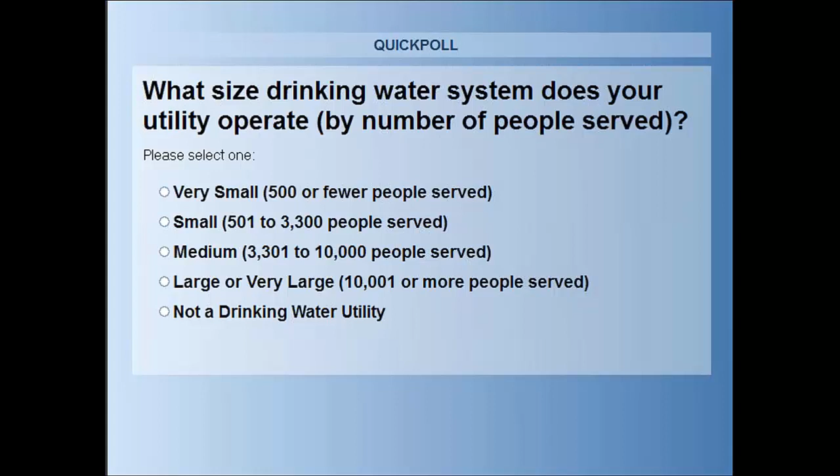I started out doing hydraulic models for master plans. And as I got into the extended period hydraulic modeling, I started seeing these interesting operational similarities and things like pumping in circles, not utilizing storage, peaking off sources. And I just thought, this can't be very efficient. And so I started getting into what I called system optimization studies.

And you can see my Venn diagram there, that I focus on saving energy and saving money, but at the same time we're looking at water quality and the level of service. We can't sacrifice water quality or the level of service or the hydraulic performance of our systems going too far into energy efficiency. So it's a balance between all those things. And in reality, most times when you fix inefficiencies, you actually improve system performance and improve water quality. So that's exciting.

So over the last couple of years, I started also getting into water and energy audits, and then started helping power companies with their efficiency programs. The last I counted, I've helped over 40 water systems directly, and then countless others through the UNC Environmental Finance Center, through rural water associations, through state divisions or departments of drinking water. It's getting very exciting, being able to help people find inefficiencies in the water system and at the same time save money, this untapped source of money.

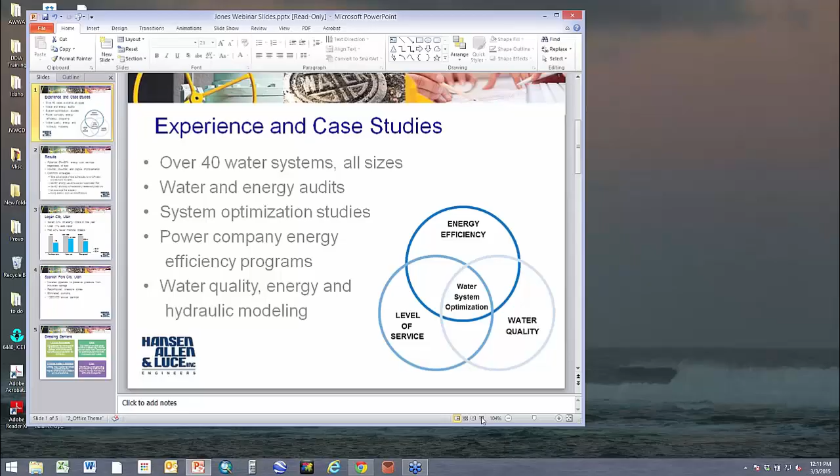And so going to my next slide, the results. For several years, I was just preaching this and doing the studies, but it's exciting now to have lots of results. Usually what I see in all systems that I look at is 5 to 50% in energy cost savings, and that's regardless of size, large or small. And EPA Region 9 just did a pilot study not too long ago where they showed an average of 17% energy savings and an average of 26% in energy-related cost savings.

And those are right in line with what I see. Even the most efficient systems that I look at, if they use energy, there's at least 5% of available energy efficiency measures they can take to save money. And most is in between that, and there's several that are in the order of 50% savings potential there.

And that's through no cost, low cost, and capital improvements. And usually it's fairly well split between the no cost and the capital improvements, which is exciting. There's a lot of things that could be done with that no cost to you, and that's basically what we're focusing on today. Just taking the step to look at your bills, to start noticing how much energy is going on, and taking steps to change that with very low upfront capital.

Some of the common strategies that I look at, and I don't want to focus on these too much, I want to let Doug and Don talk about those, but taking advantage of rate schedules for on and off peak and demand benefits, identifying energy use and use lowest cost water first, identify and stop the unnecessary release of pressure. That includes the pumping in circles, etc. Using a storage like a battery, and then pump station and well modifications, finding the energy savings there.

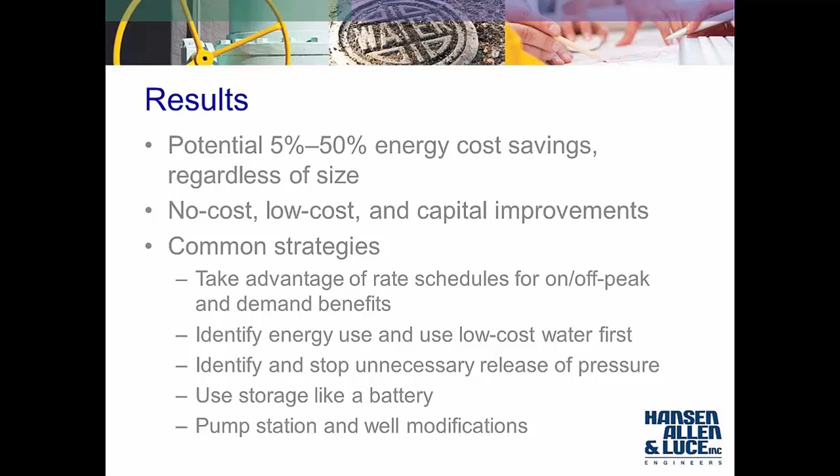Thanks very much, Steve, and I'm going to say a quick word to introduce Doug, and then he will take it away with his part of the presentation. Doug Evans is the Chief Technical Officer at Mountain Regional Water District, a governmental water entity that serves the Park City area of Utah. Prior to that time, Doug managed a water district for Salt Lake County for over 20 years. Doug helped establish the Mountain Regional in January of 2000 with only 300 customers, but it's since grown to nearly 5,000 customers. And the district is a regionalization of otherwise failing or struggling water companies.

The district serves a vertical extent of over 3,000 feet with many pump stations, including some with significant horsepower, which has placed energy management and conservation as the paramount operational goal of the district. Doug and the Mountain Regional Water District have realized over $300,000 per year in savings as a result of his energy and conservation management strategies. And Doug, like Steve, was a big help to us during the first round of the Small Systems Project. So thanks very much for what you're about to share with us, Doug. Thank you.

Mountain Regional is a district that has a significant amount of power and energy cost. We're about $1 million a year in energy costs if we weren't doing any conservation. And so it was necessary to look at some of these things and especially start with some of the easy things first.

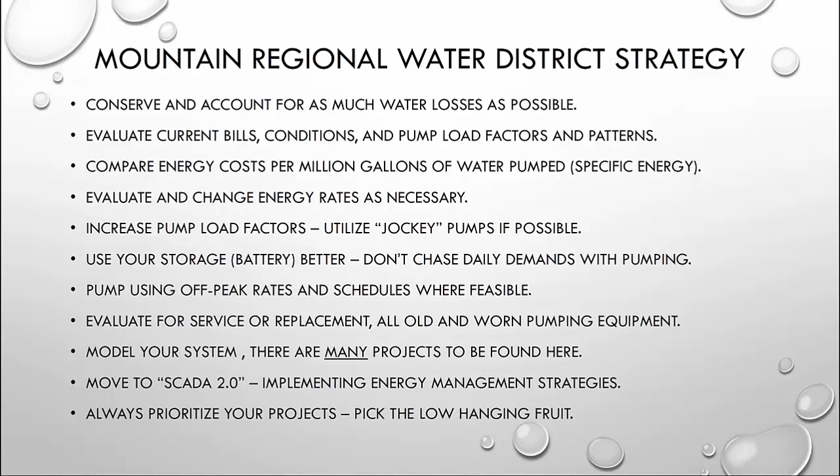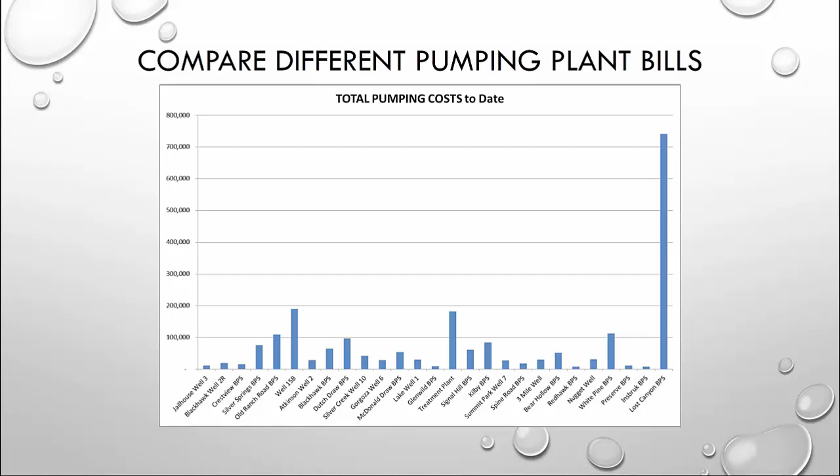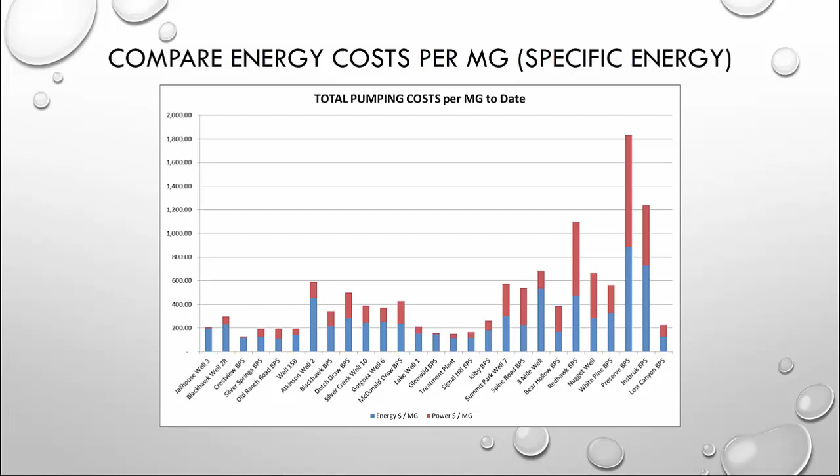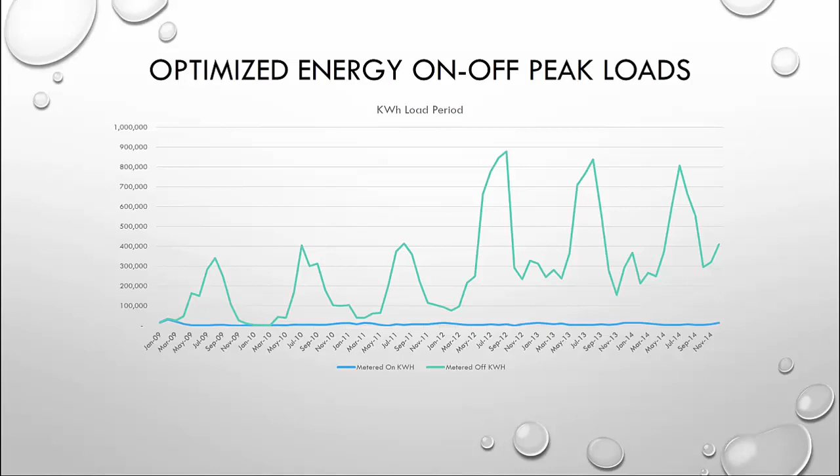Dawn has a BS in chemical engineering from the Rose-Hulman Institute of Technology in the state of Indiana. Dawn is a licensed engineer intern. Her experiences include working as a wastewater treatment plant operator, a manufacturing engineer, design engineer, and she is currently a program manager working with the Wichita State Environmental Finance Center. Dawn has designed and overseen construction of water treatment and distribution systems and wastewater systems as well, and has worked with federal, state, tribal officials, and many others. Dawn also works with another one of our environmental finance centers, the Southwest in New Mexico.

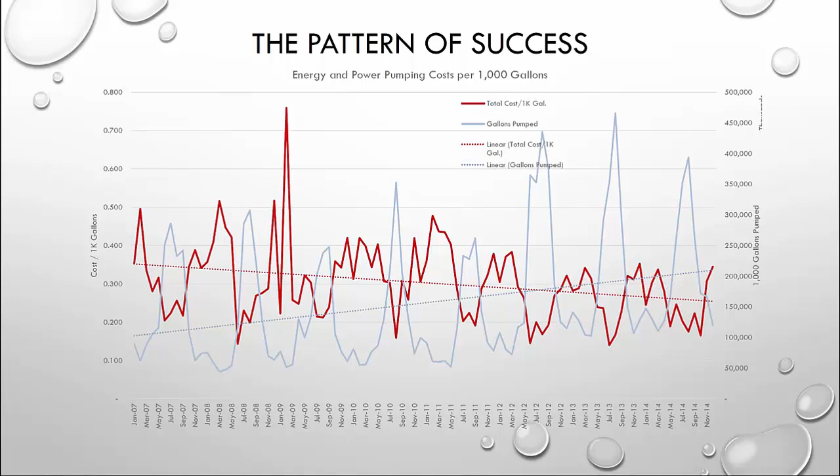Since joining them in 2006, Dawn has presented trainings around the country to water and wastewater systems on topics including asset and energy management, rate setting, capacity development, construction cost estimating, water treatment, operations and maintenance, and operator certification. Dawn has also been involved with the network in various other projects such as leak detection, green projects, source water protection, and many others. And Dawn, take it away.

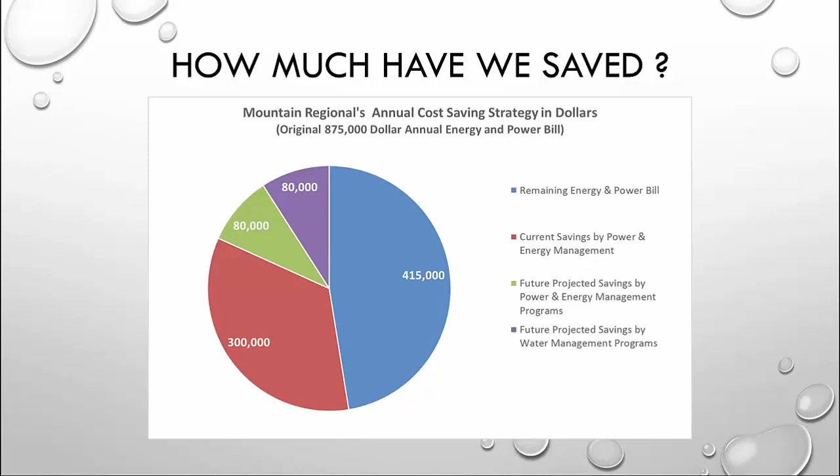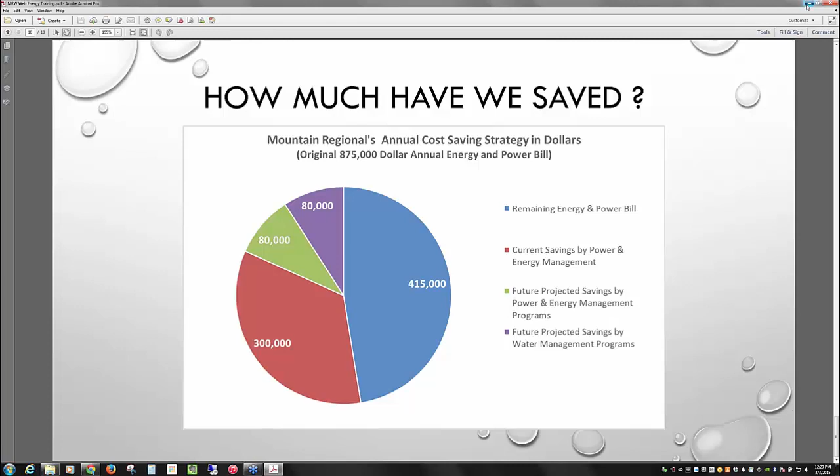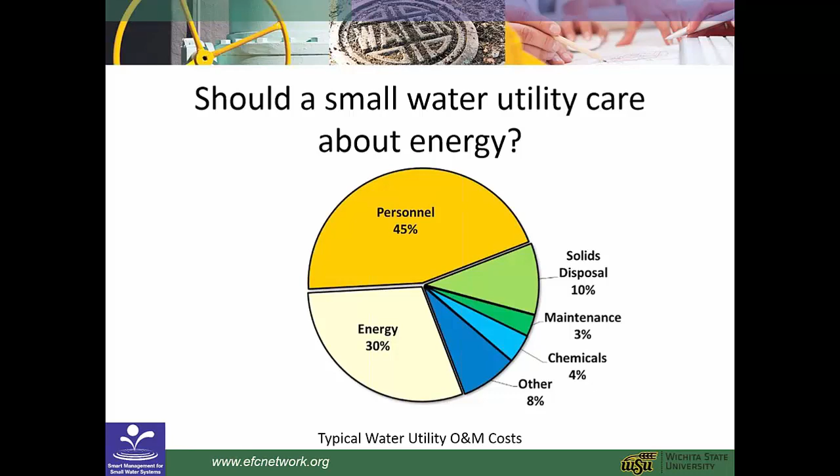So if your system has potential for energy savings, and you can agree that one of your goals is for your water system to provide services for reasonable and fair user fees, then one of your goals is also reducing your energy use. So how do you go about getting started? NYSERDA developed a 7-step approach for water and wastewater systems to implement an energy management program. They have a best practices handbook, and it can be found at the web page that's provided here.

Several years ago, when the EFC started researching energy management for small water systems, we determined that NYSERDA's program was clear and concise. There are other approaches to energy management available. We selected this program because the primary goal of this approach is to ensure that energy-related decisions are well thought out and that all stakeholders involved understand the reasoning behind any proposed changes.

So who is NYSERDA? Here's just a little bit of information about them. It is the New York State Energy Research and Development Authority. You can see their mission statement, and their municipal water and wastewater sectors are a target to strategically reduce energy consumption in New York. Their information is all available, all published on their website. It's all free. They're very willing to share and to help other systems. So we're very grateful to them for sharing their information.

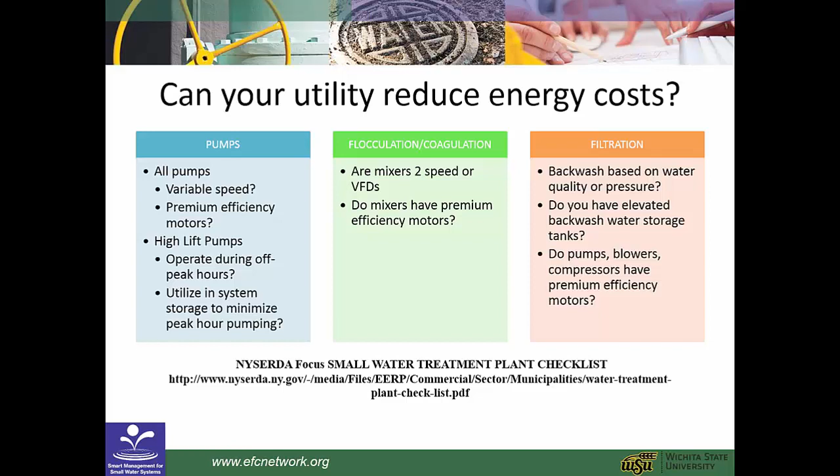So we want, step 1, to focus on building a diverse project team. And you want that team to be committed to supporting your energy management process. When you talk about energy use and energy reduction, it cuts across many organizational boundaries. So it's important to make sure your team is diverse enough to understand the wide variety of issues and the needs that come up with energy use reduction. The specific level of effort required by the different team members will probably vary throughout the process, but it's essential that you maintain their commitment.

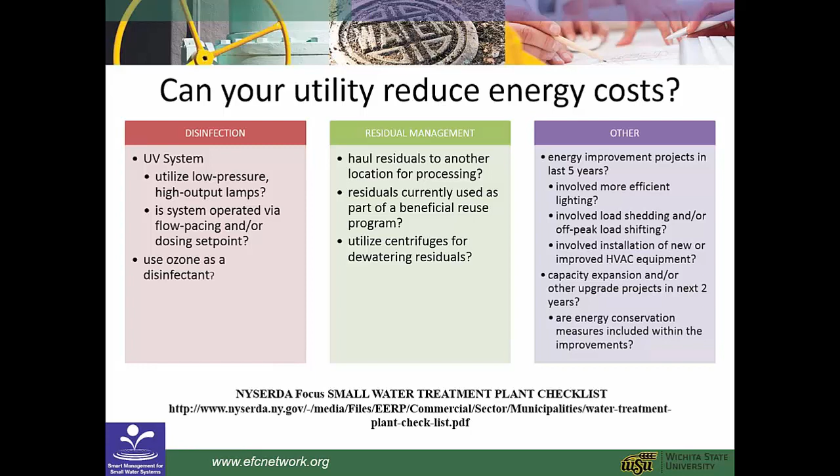The size of the energy management team needs to mirror the complexity and the size of your own utility. So the team needs to be large enough to represent different perspectives on energy use, but you don't want it to get so big that it becomes burdensome or cumbersome so that you can't accomplish anything. So you want to make sure you have a good balance. Who would you include on your energy team to make sure that it's diverse enough to cover the wide areas that energy topics cover, but not so big that it becomes cumbersome?

Would you want to include an elected official, a decision maker, a manager, an operator, someone from the operations staff, a member of the finance team, someone from business management, someone from engineering. Can you think of other people that you would like to have on your energy team?

Step 2 of the program is to develop a baseline of energy use. So what do you need to do to develop an energy baseline? Well, first, we want you to focus on the information that's readily available to you. We want you to take that information and organize it into a basic model that can help you understand your energy use patterns. And then we want you to communicate those initial findings.

So you need to collect and organize equipment, energy use, and hydraulic data. You need to develop an understanding of where, why, and when energy is used. And then you can create a baseline of energy use. And we want you to understand your energy bills and the rate structure that's used to set your energy costs.

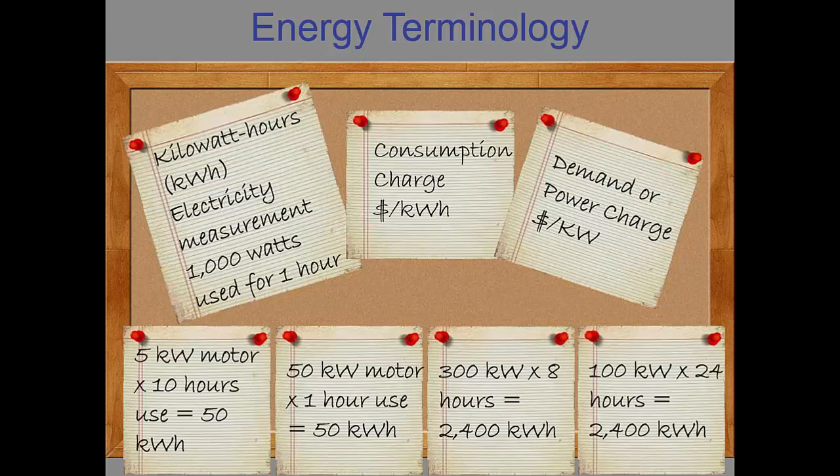And Energy Star offers many types of trainings, and they're going to hold a couple of live trainings coming up here in just a couple of weeks for Portfolio Manager 101 and 201. You can find their trainings listed on their website at energystar.gov/buildings/training. And here's the website for NYSERDA's, and the website for AWWA's document.

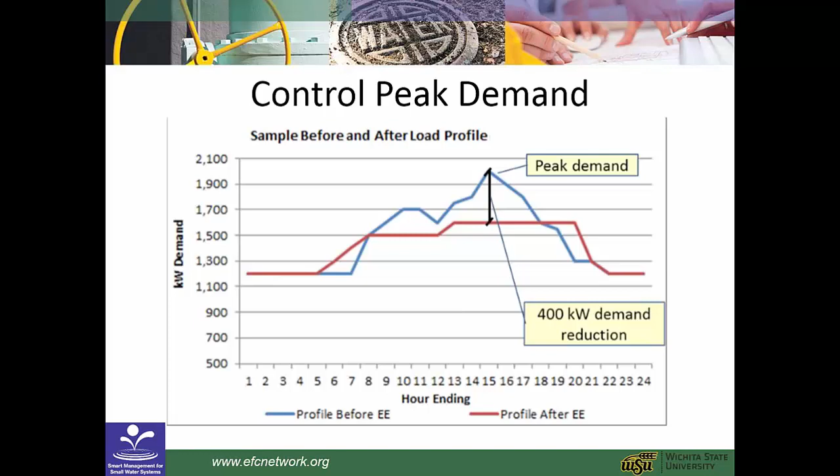You may also have an energy audit or an energy assessment completed during step 3. Energy audits and energy assessments are slightly different. So to help you collect the data, you would probably want to consider the expenses that you have and where you're at with the process. You can do an energy assessment yourself. You usually would hire someone from an outside entity to complete an energy audit for you. And if you do a system walkthrough with that table from the previous slide, you can essentially gather the data that you need to perform a level 1 energy assessment.

When you're looking at doing an energy assessment or an energy audit, there's several areas that you'll want to look into. Things like raw and finished water pumping, chemical mixing, backwashing, well systems, ozonation or UV disinfection, load shifting, distribution systems, your SCADA system, energy efficient motors. And it's also very important to consider and understand the tie between energy efficiency and water loss.

If you're treating and pumping water that isn't being sold, but it's leaking out of the pipes, you're just throwing money away. So AWWA has developed a water loss audit spreadsheet, and the EFCN has developed a guidebook that walks you through AWWA's audit process. The EFCN will be holding webinars later this year that discuss water loss, and our guidebook's also available for download on our website as well.

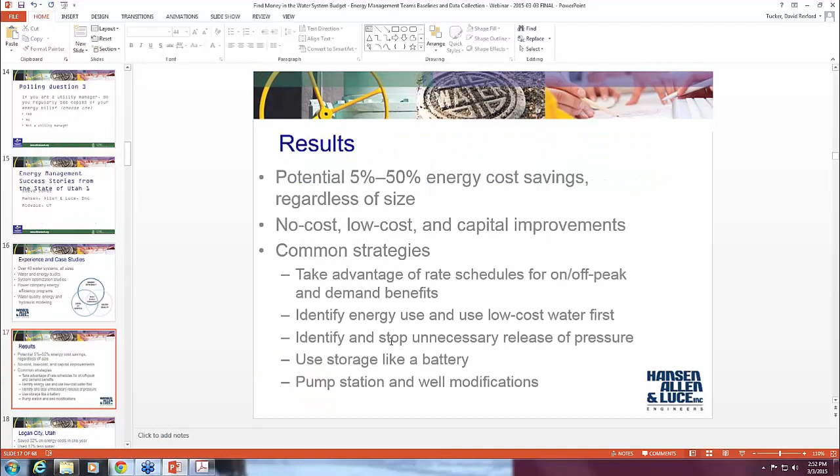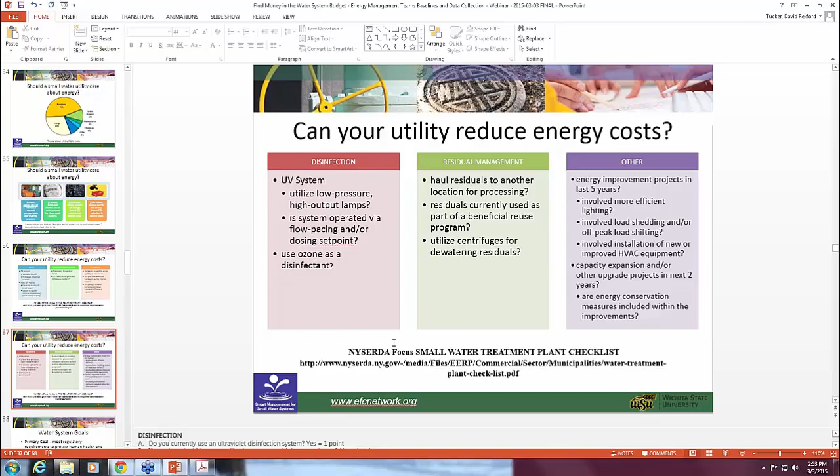We also have this question from Paul, and I'm going to direct this initially to Steve. Have you looked at restoration for any of the systems you've worked with of existing pumps to optimize performance, i.e. reduce energy costs? And if so, have you considered sandblasting and then coating the interior of the pump as part of the restoration effort? I've looked at just about anything you can think of as far as trying to save energy. I can't say that we specifically have done that. Usually it's replacing or modifying pump stations.